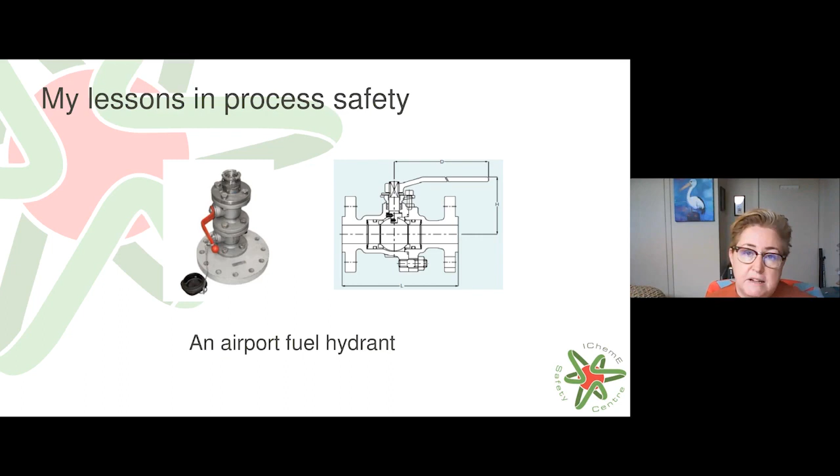We had failed to contain product when we should have contained it because we didn't assemble it right. And I didn't know enough to do the checking to make sure that it was assembled right. And that's how we ended up in that situation. So that's the first example of a process safety incident in my career.

The second example was a pipeline. And I was in charge of pumping product through this pipeline. This pipeline had a temperature rating of 55 degrees. And it was a 300-pound pipeline. So very heavy rated, reasonable high temperature pipeline. I allowed product to go through it that was at slightly higher than 55 degrees. And every single flange, the entire length of that pipeline, leaked because of thermal expansion.

I was running at very low pressure, nowhere near the 300-pound rating, but the thermal expansion got me on that one. No injuries, no incidents, no environmental impact in an ongoing sense either, because we were able to very easily pick up any remnants of what spilt. The reason the product was so hot was because it was a very thick product, so literally a shovel was able to be used to resolve the environmental impact in that instance.

But another example that at the time I didn't realise, and it was a result of me really not knowing what I was doing. And so what I needed to do is sit back and reflect on these incidents and really understand what caused them. And I would say they came down to, in both instances for me, knowledge and competence. I didn't have the knowledge nor the competence to do what I was doing at that particular point in time. I should have questioned, I should have asked different questions. I should have further understood some of the background of what I was doing, but I didn't.

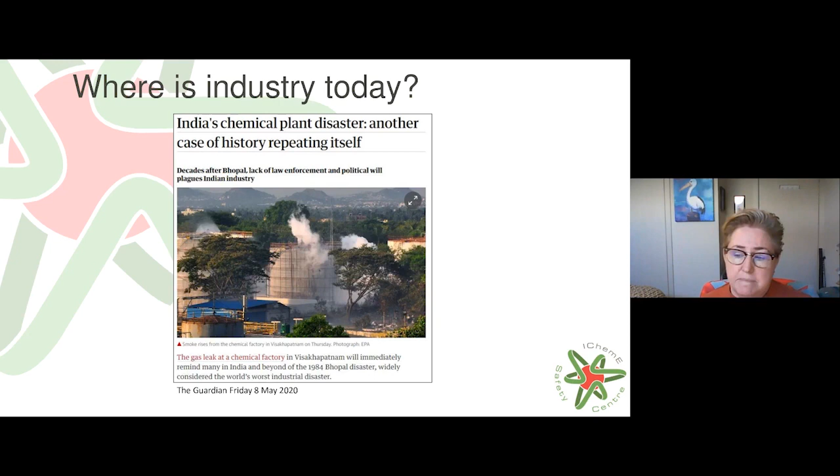Back in May, there was an incident at a chemical factory in India. And I have to admit, the moment I saw this first news report, I had a flashback of thinking about Bhopal. A toxic gas was released from a plant in India, and it engulfed the local suburb, the local township where people were living. I think so far the death toll from this has been 13 people. But there were actually people being affected lying in the streets. And that was, I think, what really struck home to me about Bhopal and the comparison in there. So we are still seeing incidents occur today.

Crude trains. So trains used in Canada to transport crude oil. You may have heard of an incident called Lac Megantic. So that happened 7 years ago in the small town of Lac Megantic in Canada. And 42 people, I think, from memory, were killed in that particular derailment and explosion. But there have been 7 major derailments in Canada since then that have spilt crude oil as a result of it.

So what can we do about it? You're all studying engineering. What do you need to do right now as you're learning, but also as you graduate and get into the workforce? How can you stop these sorts of incidents happening? Because actually, these are the sorts of things that we need engineers to be doing. We are the people that have the knowledge and the ability to prevent these incidents occurring into the future.

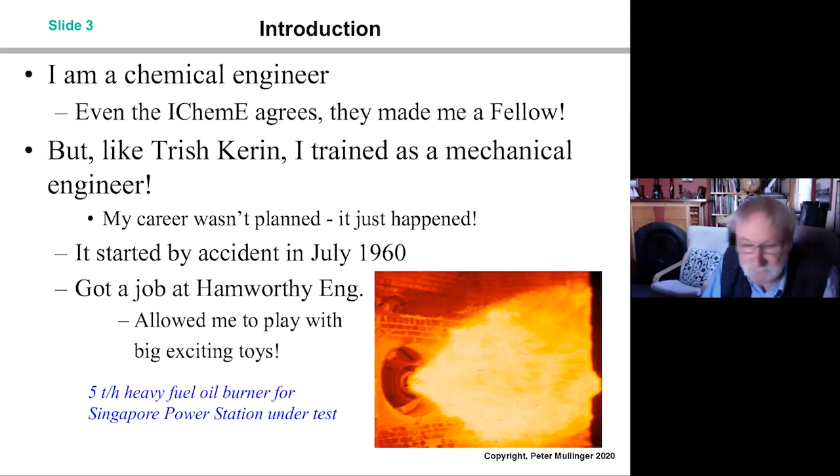What was chemical engineering like in the 60s? I was a mechanical engineer. Chemical engineering was in a very, very intense state of flux. Plants were small, but they were rapidly increasing in size. In fact, I was working mainly in the power industry through my connections with Hamworthy Engineering. And turbo alternators increased almost 10 times in just 10 years. So we were designing 500 megawatt units before the 120 megawatt units had even been commissioned.

So there was a lot going on, and there was a lot of, shall I say, ignorance. We had no computers. All calculations were slide rules and log tables. There were increases in the number of plastics being produced, massive increases in hazardous processes, and the first LNG transport. This ship, the Methane Pioneer, was converted from being a small cargo ship into the world's first LNG carrier in the late 1950s. So it was an intense time of innovation in the UK, where I was born and still living at that time.

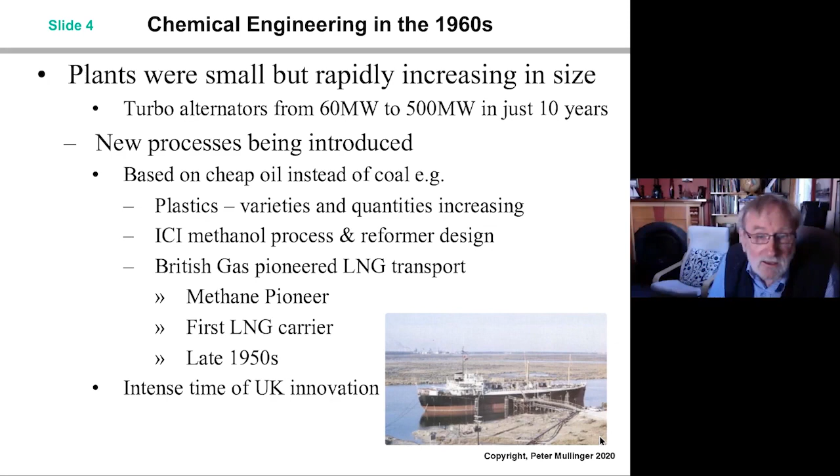Unfortunately, those innovations gave us a lot of problems. So this rapid increase in plants, with a poor understanding, produced accidents. Now, these accidents occurred even before the ones Trish was talking about, but they're basically awfully similar. It's scary. So, Feyzin in France, LPG, another big LPG explosion. Flixborough in the UK, caprolactam, a volatile hydrocarbon. I teach this to the students.

This one in particular was very similar to Trish's talk about the airport valve, the hydrant system for refueling at an airport. This was caused by a sampling system that was improperly designed, valves open in the wrong direction, and massive explosions. I can remember these. I'm old enough to remember these. In response, ICI developed HAZOP. And they also emphasized the responsibility of line managers for ensuring safe operation. This was world-changing philosophy at the time.

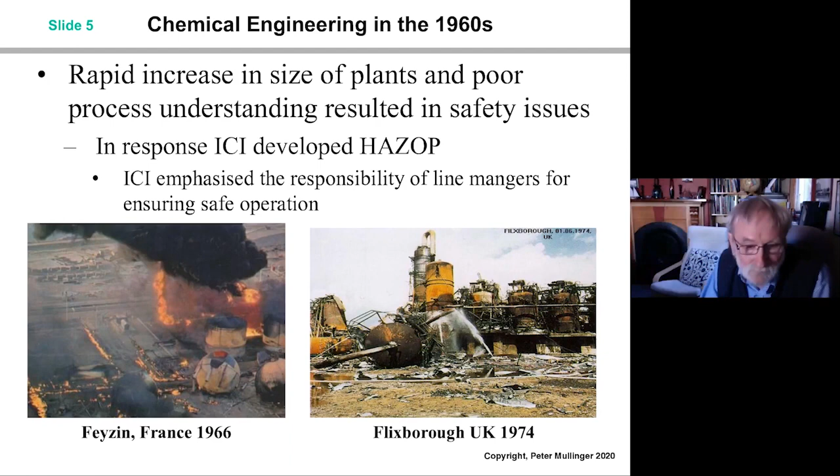1970s, what also happened? The oil embargo. OPEC had an oil embargo. The price of oil increased 400% over a few days. The weekly wage was about $30 at that time, US, and the oil price went up to $12 a barrel. Major recession, major transport disruption, stimulated oil and gas exploration and production. The North Sea, Piper Alpha was in the North Sea. It was one of the products of this embargo. We got the Bass Strait off Victoria, North West Shelf off Western Australia and the Cooper Basin.

In the UK, we had the Health and Safety at Work Act in 1974, and it made the site occupier responsible for all safety on site. This was a major change. Prior to that, the subcontractors, the individual employers on the site were responsible for safety. That wasn't working. What happened is major companies used to basically contract out all the dangerous work to subcontractors who weren't qualified to deal with it. So the Health and Safety at Work Act made the boss of the site responsible for everything that went on that site. And there were heavy penalties, including prison.

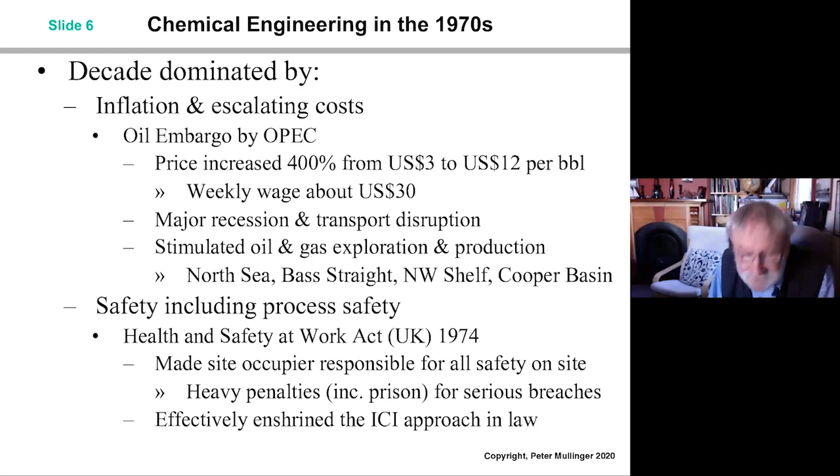Okay, so what else happened in the 70s? Oil was replaced wherever possible. Natural gas had just been discovered in Europe and in Australia in the 60s. So natural gas largely replaced oil in the chemical industry. Coal was cheaper than gas, so where sulfur and ash were tolerated, that would replace them. So it replaced them in cement and lime making. Oil was still used where coal and gas were impractical because there was no gas, or coal was unusable.

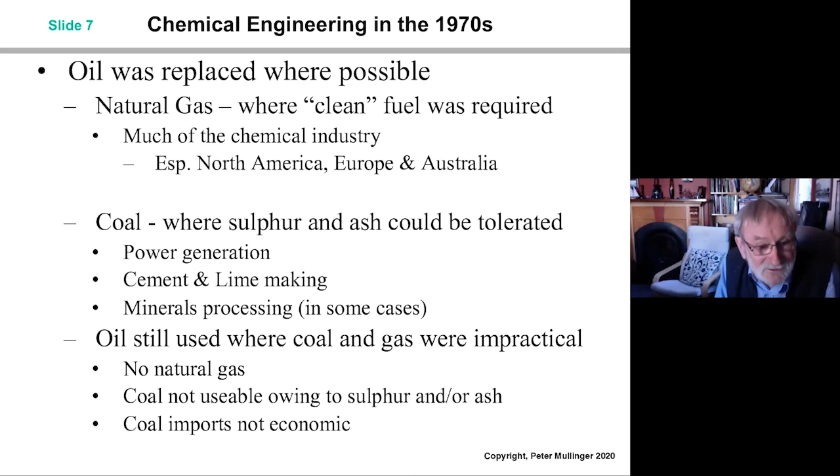So in the 1970s, in my part of my life, I took myself off to the University of Sheffield at the beginning of 1970. I got a job as a contract researcher to increase my skills in oil burner design. So I was doing this work on oil burner design, on atomization, and I graduated exactly at the time that the oil price went through the roof. So I had to find a new career. I couldn't design burners for power stations anymore because no one was going to build one. Not oil fired anyway.

So I shuffled myself gradually into the process industries. I got a job in the cement industry in the early mid-70s, and there I learned about coal. I learned about a lot of things. I had a lot of fun.

I had a job which had an amazing job description. My boss, the technical director of Rugby Cement, came to me one day and said, Peter, you know about combustion, you know about heat transfer. We've got 21 kilns. Our coal is our biggest bill. You must be able to find something to do. And he gave me a free rein to find out what made these kilns tick, how they operated.

So I was enjoying that work, but then I got headhunted to head up a company in the oil industry, a combustion company, Europe's largest combustion company in the oil industry. I was asked to join that business as technical director to lead them into a time of better technology.

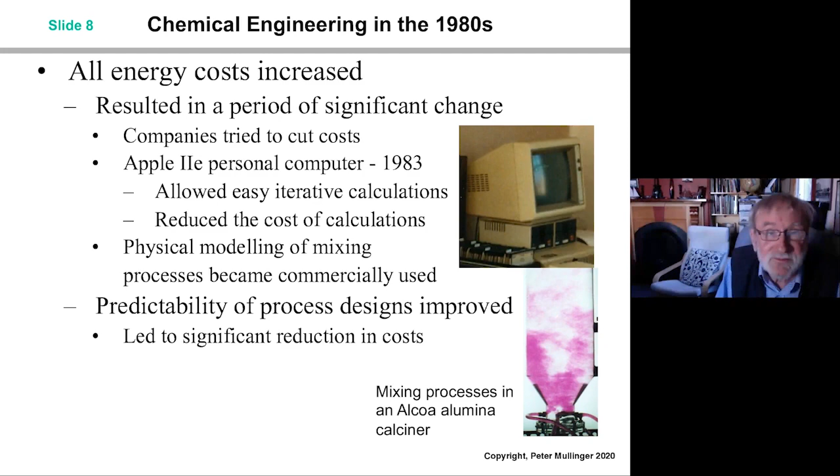And I set up my own business, which is not a particularly brave thing to do. People say to me, weren't you brave? But it was something I had to do because there were no other options. So I set up my own business. And that was 1982. So then, of course, we had all these series of explosions and accidents that Trish has been talking about.

And I was running essentially what was a combustion engineering business in the process industries. And you looked at these incidents, particularly the last two, the fire in Mexico City and the Piper Alpha explosion, and insurance companies looked at us and said, you expect us to insure you? Yeah, that was the sort of problems we had. But we managed, we survived.

But at this time in the early 80s, there was a lot of pressure on companies to reduce costs. Because the energy costs were high, everybody was forced into reducing costs. And I think some of these incidents, particularly Bhopal, were under cost pressures. The product wasn't selling. They reduced manpower. They reduced their refrigeration bill. And this directly led to that particular accident.

The LPG explosion in Mexico City, I can't comment on, apart from the fact that they did design the process incorrectly in the first place. LPG is heavier than air, and they designed a burn pit, which is a hole in the ground with fuel burning in it, as their main safety relief. A burn pit is not sensible when you've got a heavier than air product. So that was a poor error.

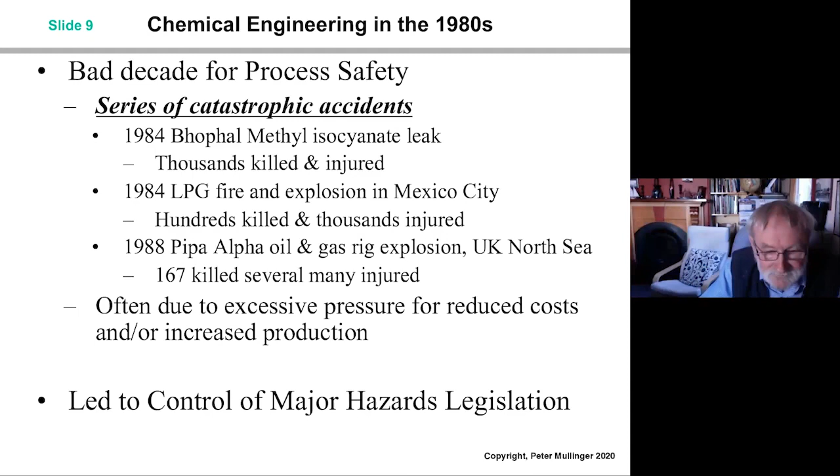So that's the 80s, or part of it. So there we are. The high cost of energy did lead to major changes in fuels, a great opportunity for combustion specialists, which I was, pure luck. But I had to change careers, move out of power generation into the process industries in order to maintain my work. So there's a mini boom.

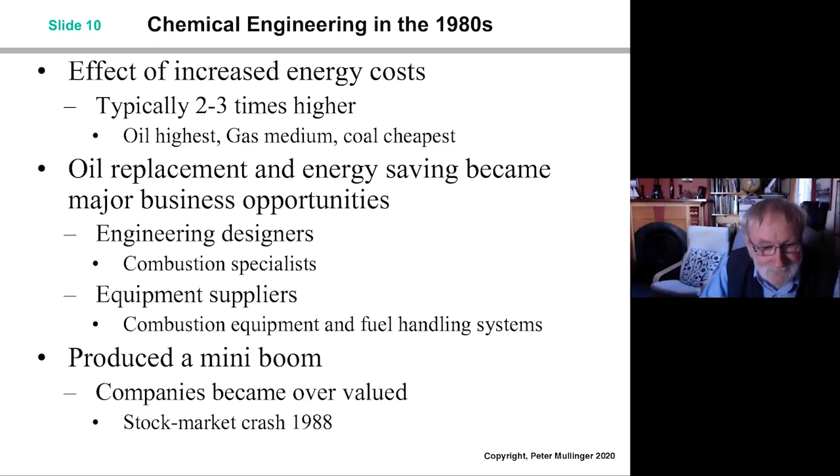So what happened in the mini boom? The stock market values went up. Companies became overvalued. Sounds familiar? Stock market crashed 1988 and everything went bad. Interest rates went up. Overborrowed businesses failed. And we started to look at greenhouse gas emissions. It's the first time they were widely recognized as being detrimental.

We'd actually known about greenhouse gas emissions since Arrhenius, the famous Swedish scientist who worked out the reaction equation. He did his PhD trying to work out the cause of ice ages. And he came to the conclusion that ice ages were being caused largely by changes of CO2 in the atmosphere. And he worked out, by a very long-winded way using slide rules and log tables, the contribution of carbon dioxide to the Earth's temperature. And he did that in the early 1900s.

And believe it or not, I was taught about this work when I was at school in the 1950s in chemistry. So it's not new. And you will see there I have a clipping from a newspaper in New Zealand. And New Zealand, in my opinion, has made some amazing contributions to the world.

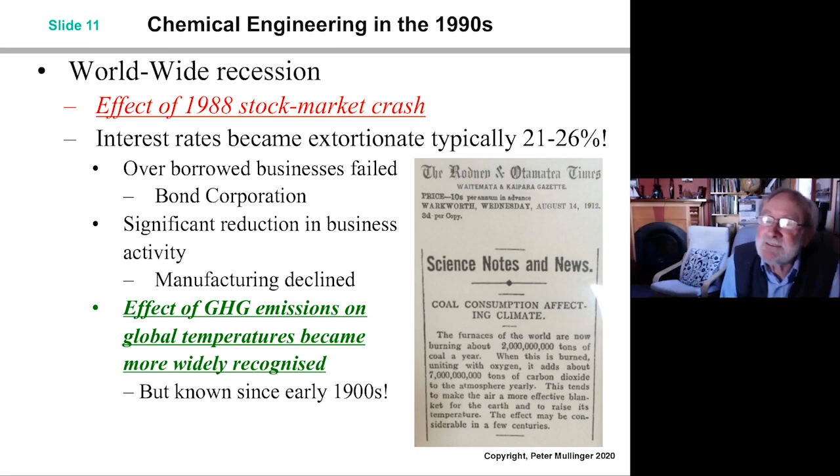We understood it a long time ago, and yet we still have climate change deniers. One way of tackling them is to say, well, look, if we didn't have CO2, we'd be the same temperature as the moon, minus 15 degrees. That's about right. So we've known about global warming, but it's only with the massive increase in scale of things that it's become a real issue. In fact, Arrhenius thought it was a good thing because Sweden would never have another ice age. Now no one's quite so sure.

Okay, here's a good example. This is Lake Louise in Canada, one of my favorite parts of the world. First time I saw this lake in the late 80s, this glacier was down here somewhere. This is where it was in 2010. If we don't address these issues, all those Columbia ice fields will be gone in 100 years. And it amazes me that the United States doesn't really take this seriously, because most of the United States' drinking water actually comes from the Columbia ice fields in Canada. So they should be taking it very seriously.

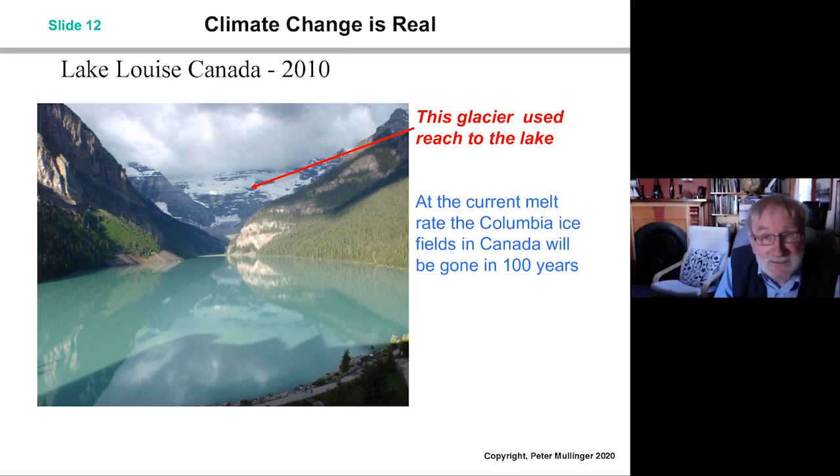Okay, so where we were in the 2000s. China, the rise of China as a manufacturing power. It drove a minerals boom, especially in Australia. And we started to worry about peak oil. Now, the amazing thing is that we cannot predict the future. It's impossible to predict the future. People are always trying to predict it, but we can't. So in the early 2000s, we were worried about peak oil. There was an assumption that oil was going to run out very quickly. So there were many attempts to produce renewable oil substitutes, biodiesel and the like.

I had just joined the University of Adelaide, and I was working on so-called clean coal projects. And where's all that now? All gone. We got coal seam gas, we got oil and crude from fracking. The barriers to success of clean coal programs are enormous: major complexity, huge quantities of CO2 to be captured and sequestered. There is enough storage, but you cannot get the CO2 stored at a high enough rate to sequester the CO2 for a large power station. The rocks just aren't porous enough. As a consequence of all these things, renewable energy becomes a major industry. Where does that put me? Well, I'm now in academic teaching.

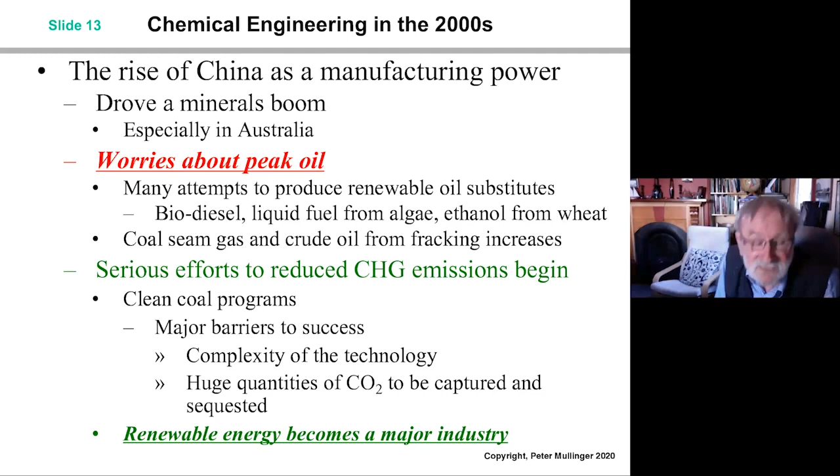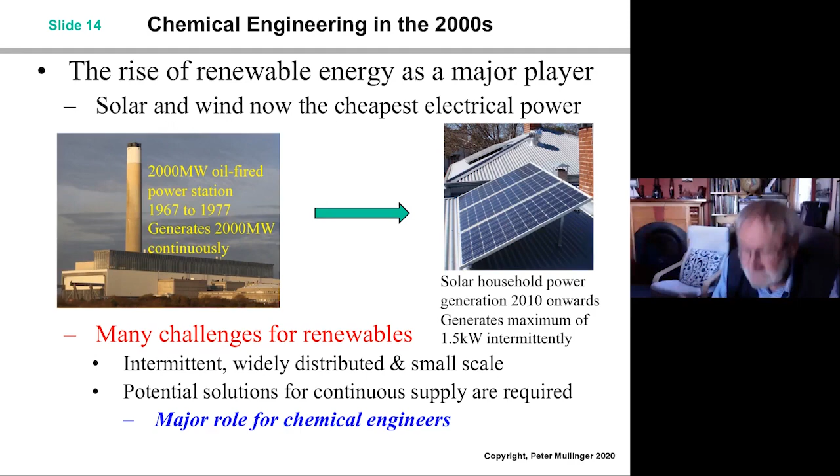Then we get the GFC. So 2008, we get the global financial crisis. Results in large debts. Business activity declines again. Oil price collapses. All the attempts to produce oil, renewable oil, are abandoned. Clean coal also abandoned.

We've got a warming climate, driving more air conditioning, driving more desalination. We need a lot of water. Sustainable water is one of our biggest issues. In fact, I sat on a conference back in 1984. It was an IChemE conference, looking at future water. We've got to search for new solutions to store renewable energy.

The role of hydrogen is being promoted. I see water availability as a limiting factor. I don't know if anyone does the sums of how much water you need to replace even natural gas in our economy. It's a huge amount of water to make that hydrogen. Any of the hydrogen that leaks, that water is lost to the planet. It goes up into the upper atmosphere. We're looking at things like molten salt to store thermal energy, better and larger batteries, all roles for chemical engineers.

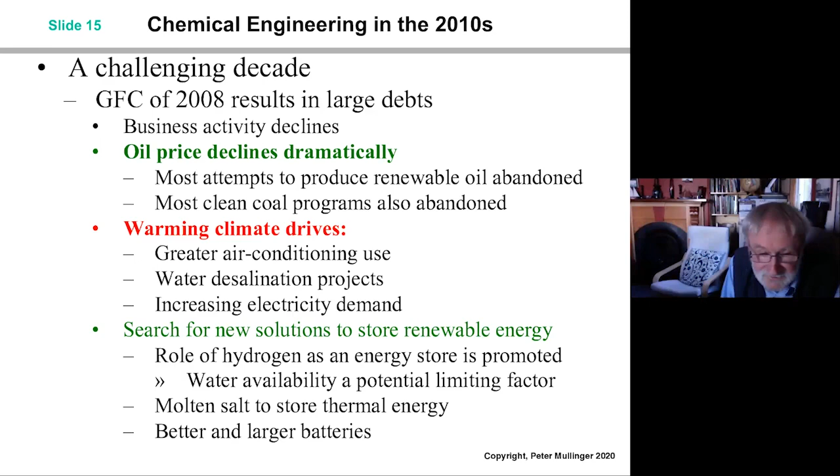Okay, I think chemical engineering will remain critically important to address these challenges. In fact, I've never been sorry that I shifted from working in mechanical engineering to moving into the process industries. It's been more interesting, more enjoyable, there's been more opportunities. I've been able to do a lot more things than I would have ever done if I'd stayed a mechanical engineer. So those are the sort of things which we need to focus on, and they're all roles for chemical engineers.

One of the things I would say is we can't predict the future. The keys to success, though, are flexibility and ability to embrace change. A lot of us can't embrace change, and that makes it difficult. Change will always occur. Ongoing learning. When you graduate, the IChemE will put great emphasis on continuing professional development. I have been a very active member of that space, and it's one of the reasons I've been able to shift from being a mechanical engineer in the power industry to being an academic. Whoever thought I would be an academic? Not me, that's for sure.

Get involved. Become members of teams. Team working is critical. A lot of students don't like team working, but you can't always choose your team members. You have to work with them, though. And you can work with people you don't like. And in my life, I've worked for two people I've liked, but can't work for.

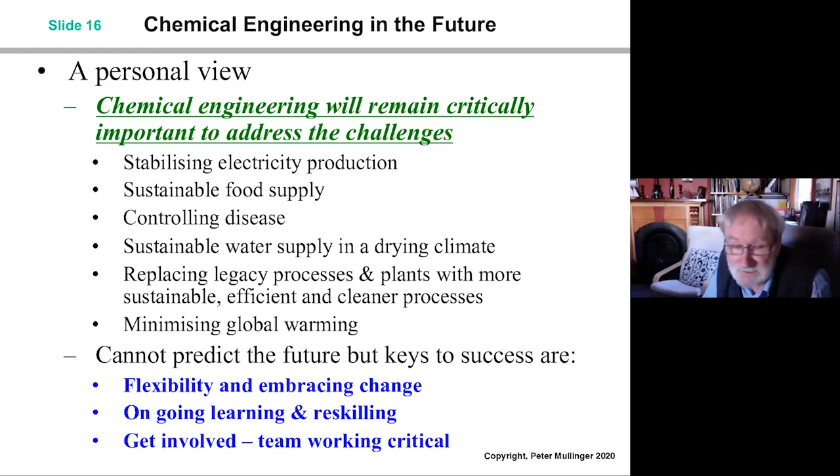I'll talk about that one. No, I won't talk about those.

So, new materials, innovation critical. Developing new materials is also critical. Most of our key advances through time have been dependent on the development of new materials. So we had cast iron in the 1770s. Abraham Darby worked out how to make cast iron, smelting it using coke. And that cheapened the iron dramatically, because prior to that they had to use charcoal. The world's first iron bridge was built in Shropshire in the 1770s.

Steel, the 1880s. Thermoset plastics, Bakelite, in the 1920s. Polythene and nylon developed in the 1930s. Not in widespread use until the 40s, but they were developed in the 1930s. Semiconductors, chips, 1940s. Battery materials, 1990s. Graphene, maybe. What new materials are we going to produce? But we have to produce new materials to do new things. We certainly need greatly improved battery materials.

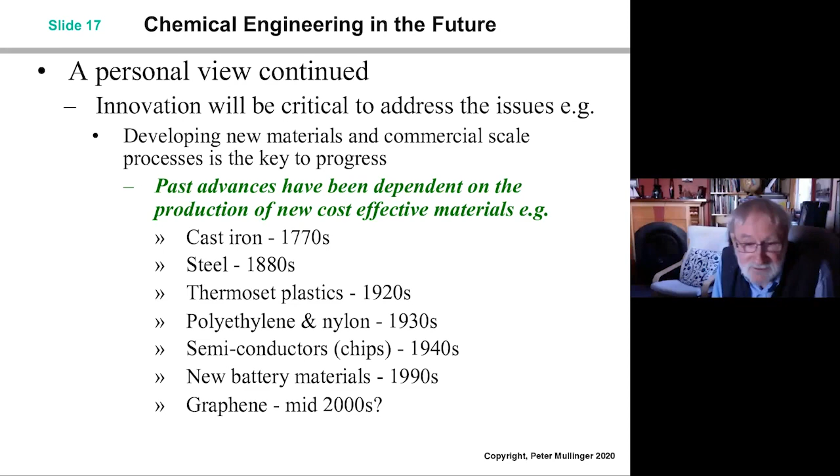Personal view of these things. Be patient. Typically it takes 40 years for a new advance to become widespread. Now, we are in the habit of saying today, things are happening more rapidly than they were.

It's not actually true. The first steam locomotive, high-pressure steam locomotive, ran in 1804. 40 years later, there were 22,000 route miles of railway in Britain. 22,000 route miles built in 40 years, largely by hand, most of it double track. That's an enormous achievement, and it made a huge difference to people's lives because ordinary people could move for the first time.

Computers, it's always claimed that computers have developed very, very quickly. But no, they haven't. They were actually invented in 1943. The first computer was at Bletchley Park in 1943. They didn't come into general use until the Apple computers came out in the late 1970s, early 1980s. Another 40 years. Mobile phones were actually invented in 1947. Again, we didn't get them in general use till the 1980s.

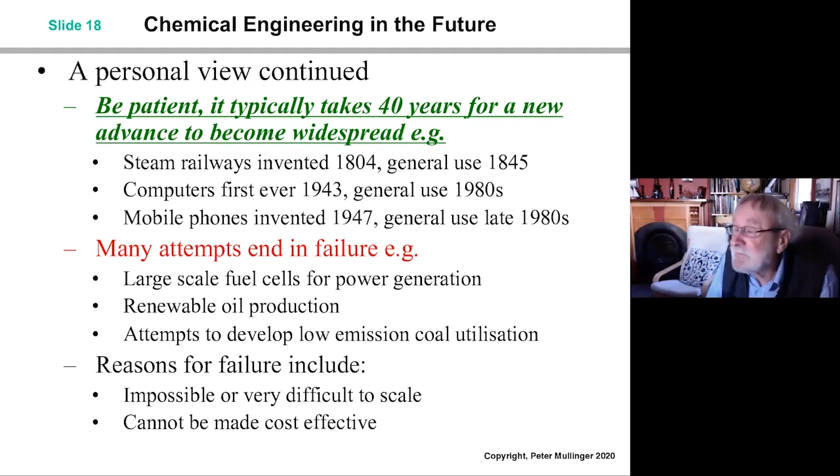Okay, some concluding remarks. Take opportunities when they arise. Don't be afraid of a challenge. Be prepared to move out of your comfort zone. It can be great fun. Learn from your mistakes. We all make them. Trish talked about a few she's made. Admit them and move on. You must learn from them, though.

If a job's not working out, fix the problem. Change jobs or start your own business. Don't be afraid to change jobs for less money. I've done that 3 times in my life. Stay flexible. The world's been in constant change for 2,000 years. Industries come and go, employers change. Your basic skills are transferable.

Keep learning. One of the best bits of advice I got was from an old mining engineer at Rugby Cement called Paul Dennison, who said, "The day you stop learning is the day you start dying." I'm 75 now, and that really has hit me. I've kept that in mind almost every day.

And I'll finally end with a few books that I found inspirational. These have influenced me greatly. These are books I generally read when I was younger. I've read a lot of them again in more recent years. Frank Whittle, the inventor of the jet engine, a story of absolute perseverance against almost insurmountable difficulties. Relied on new materials to be developed.